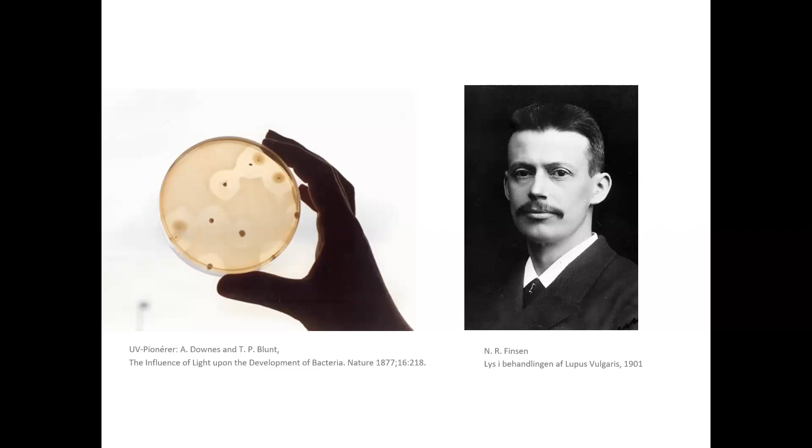So Finsen discovered that light, passively, of course, actively, chemically, could cure this disease. And Niels Ryberg Finsen's work spawned modernism as we know it today. I hope there are some architects present, but anyway, the three elements were light, air, and natural surroundings, and they should be distributed democratically in the new order as modernism was starting in the 1920s.

And some of the highlights of this modernism were actually hospital buildings, highlighting how we should live more healthily in this new modernist world. This is the Zonnestraal Sanatorium. It was originally drawn by Duiker, a Dutch architect, for diamond workers who had been infected with lung tuberculosis. They were polishing diamonds, and this very hard dust was ripping up their lungs. And the tuberculosis, once it got in their lungs, was very difficult to cure.

So they got this stay at this hospital. Actually, many of them got cured. It was a sanatorium with a special glass quality. It had Vita glass, it's called, very, very high transmittance glass. I was there together with Klaus Martini to visit the hospital some years ago. It had just recently been renovated.

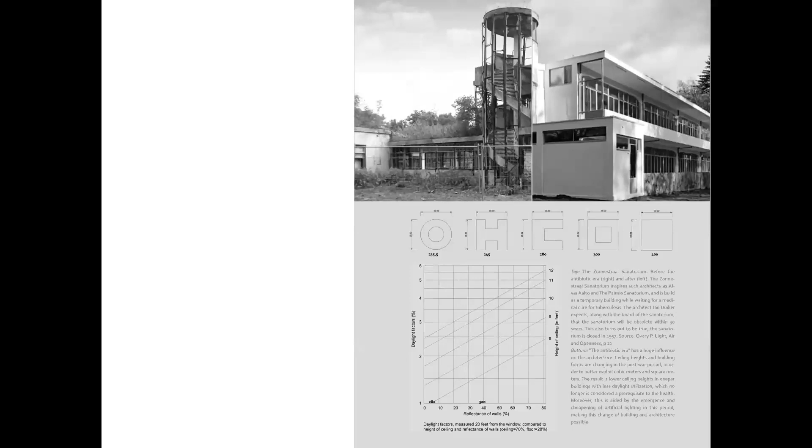But what happened in this period is also very interesting, because, I don't know if you can see my mouse, but the building typologies, the footprints of the buildings in this post-war period changed, so that the slender H-shaped, C-shaped, L-shaped, O-shaped buildings were gradually becoming more deep plan buildings. We also see that the ceiling height is being reduced in this post-war period, so daylight is no longer as important as it was in these sanatoriums, where the recommended ceiling height was 4.2 meters, which is quite a lot today. Now it's 2.7 in Denmark.

This is a short sketch of this development, only to point out the line from Downes and Blunt and Finsen and how they related to this modernist architecture. Not only hospitals, but also schools were designed according to this. Then came the vaccines and the antibiotic age, as we call it, antibiotics killing bacteria. And then we saw no architectural development for a long time when it came to health. It was like architecture was disconnected from this health regime that it originally was very, very close to.

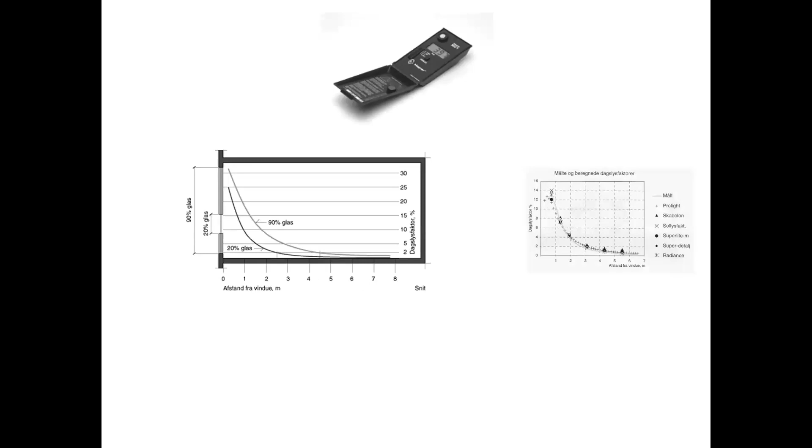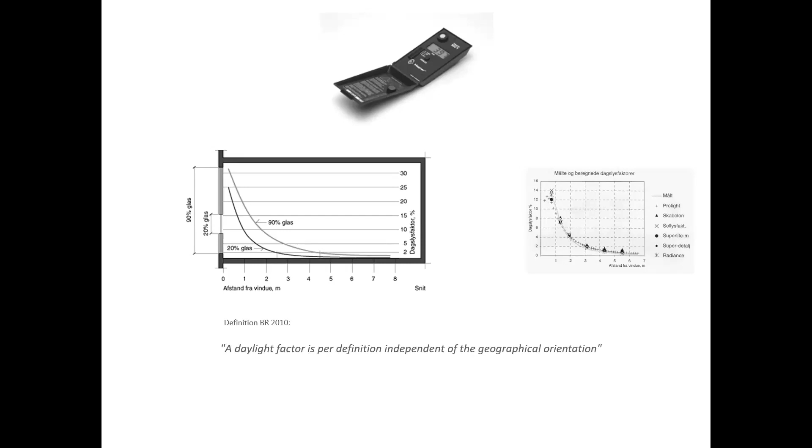At the same time, we also measure the light in this historical line. We start measuring the light in lux after the war, because we are no longer so dependent on the sun. We are starting to have more and cheaper electricity and electrical lighting, and we start measuring light, and we actually lose the orientation of the building. So if a building is facing north or east or south or west, it really doesn't matter in this post-war period, because we can just mend it by adding some artificial lights. So the importance of the sun and solar architecture is, you can use the word, forgotten in this period.

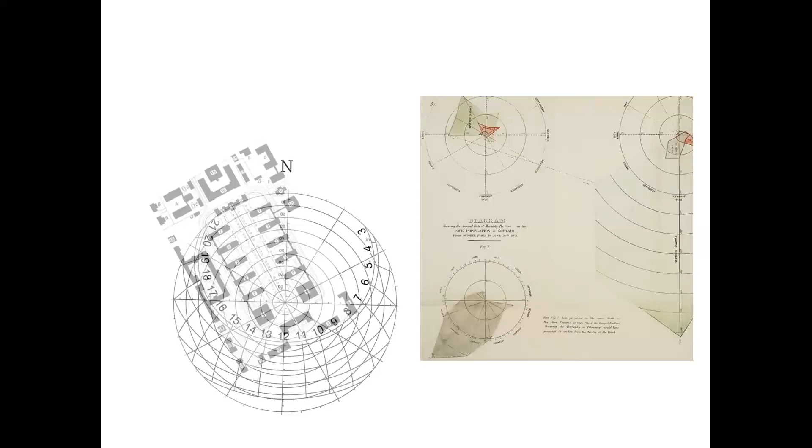Actually, this is one of my favorite examples, because in Denmark in 1920, we had this hospital. You can see the layout here to the left, where it was really orientated towards the morning sun, because that is stimulating not only to health, but also to sleep, as we know today, and to warming up the building when it was cold in the morning. And facing the winter sun, so that the sun during the cold period could heat up the original buildings

from 1920. But we see that this is the footprint of a modern building, a new building laid in the middle of the garden, completely in another direction, so that the wards are not facing southeast anymore. They are facing northeast, where there's no morning sun in the winter, and southwest, where actually there is no morning sun at all. So basically, this is an example of buildings losing their original orientation.

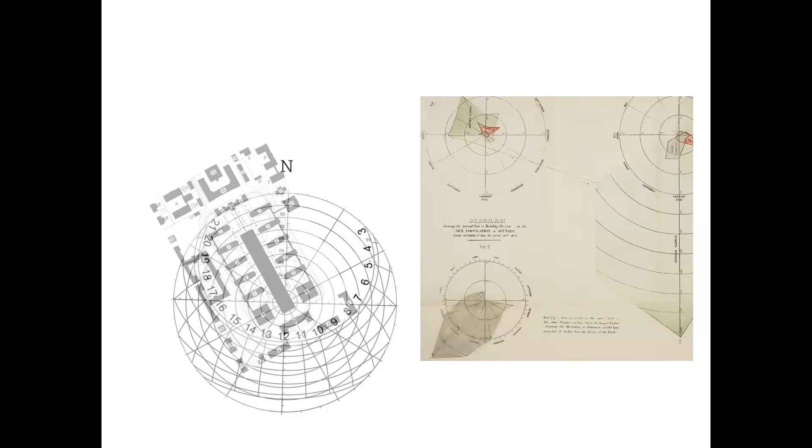This is an early example. That is the hospital that I was admitted to 20 years ago. It was a ward like this. So southeast is at the end of the corridor. The corridor is, what is it, 150 meters long, and then you have wards on both sides, so there's no daylight in these corridors.

To sort of re-establish what you call anchoring the buildings to the corners of the world again, or trying to make the sun or the solar architecture re-established and encourage architects and planners to take the sun into consideration, I developed a method in my time at the architectural school, at my PhD, and the tool I will show a film of. I think it will work. This is the clock.

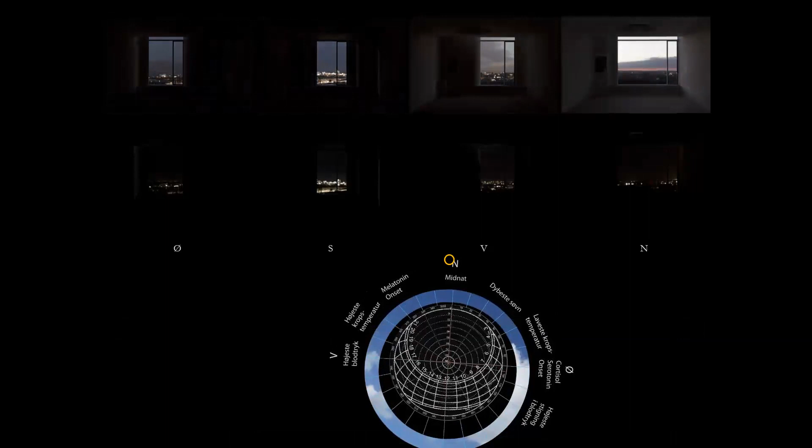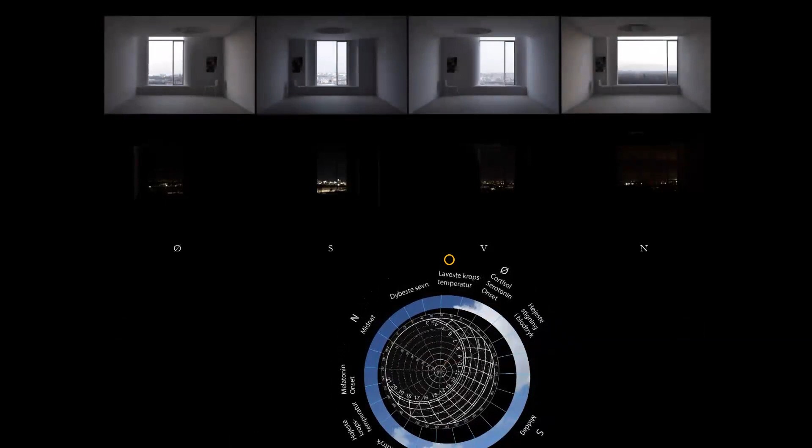So it all starts at midnight, because at midnight, I don't know if you have noticed that, the sun is in the north. It's quite interesting. We are having our deepest sleep during the early hours of our sleep, and also our temperatures are lowest. On the top film, you see summer solstice in Denmark at 56 latitude north, and we actually get morning sun very early. Below is equinox, where we have 12 hours of light, 12 hours of dark, and that actually fits better to the high rise in the blood pressure and the serotonin onset that we just passed.

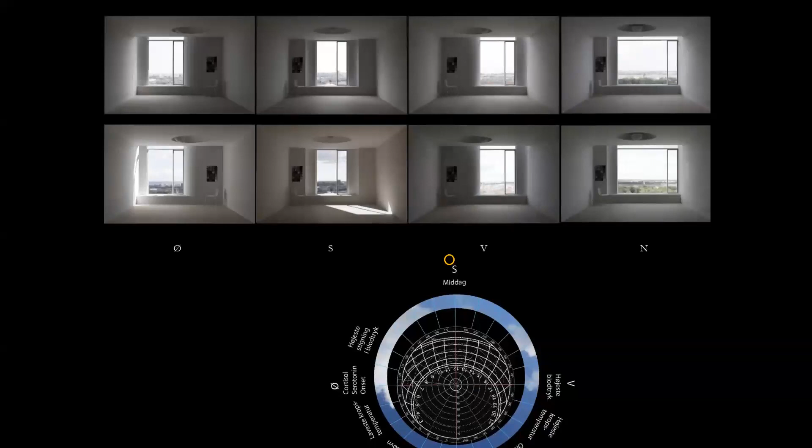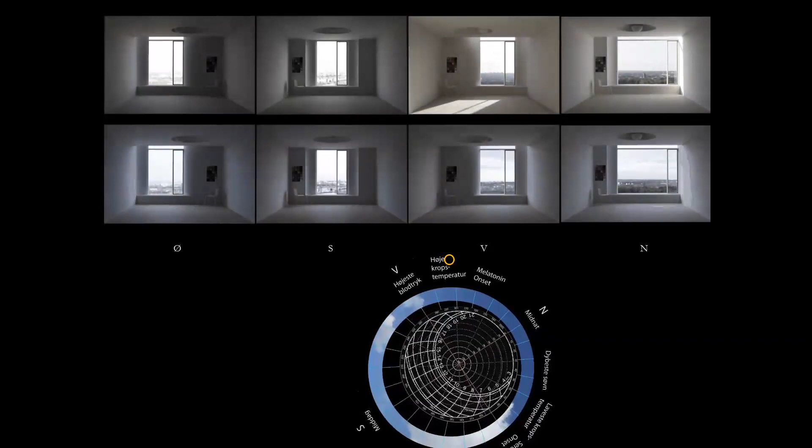And as we move on until midday, we see that east-facing and south-facing rooms actually are stimulating serotonin and the wake process better than west and north-facing rooms. And then, after a period of a lot of things going on in our body, we have a stable period from midday and the rest of the afternoon where nothing much takes place when we're talking circadian rhythm. Only that when we are close to getting to sleep, we have a higher blood pressure and a higher body temperature. And you can imagine a west-facing room with sun coming in at the same time as we have the highest body temperature and need for melatonin onset so we can sleep. That is not so beneficial for our circadian system.

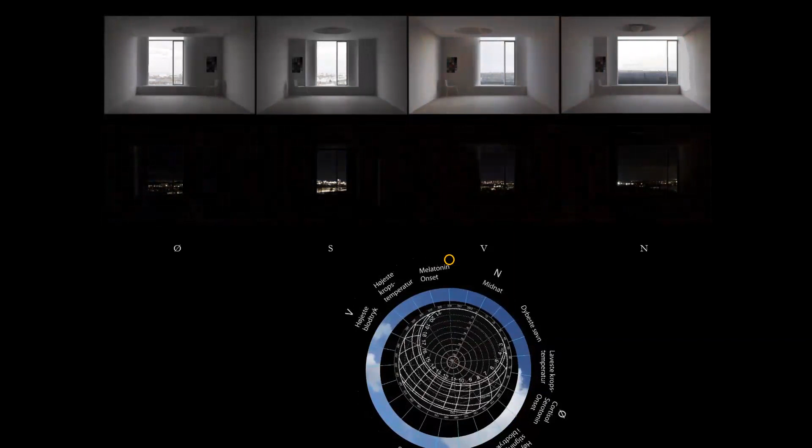So that basically was what I discovered using this method. And also I found, of course, I've not shown winter, but I've shown summer, that summer actually can disrupt, or you can say challenge, this natural body rhythm.

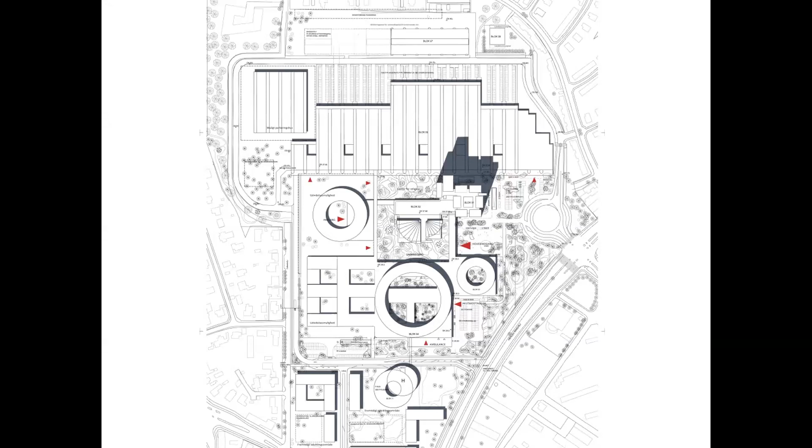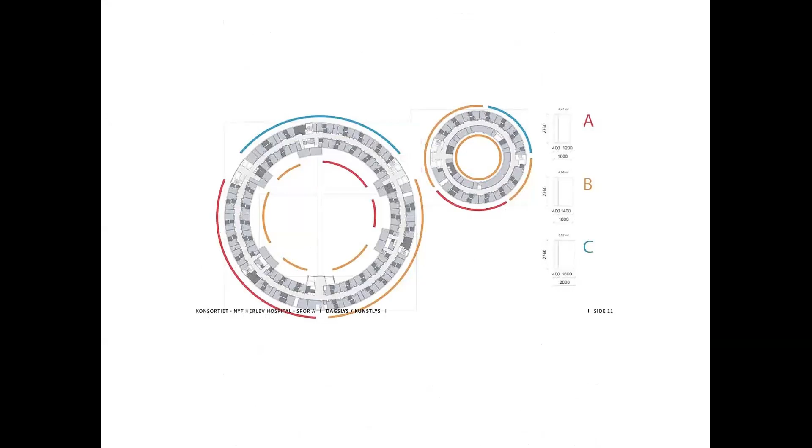That method I brought on to a hospital, New Herlev Hospital, where I was working with the facades together with Henning Larsen Architects, where we planned the facades according to north, south, east, and west. It was a round building, the round building in the middle. And this is the layout of the building, a building with a lot of wards, and then a support building with family wards, etc. We were really trying to incorporate north, south, east, and west, and we made some facades and simulations of how the windows should look.

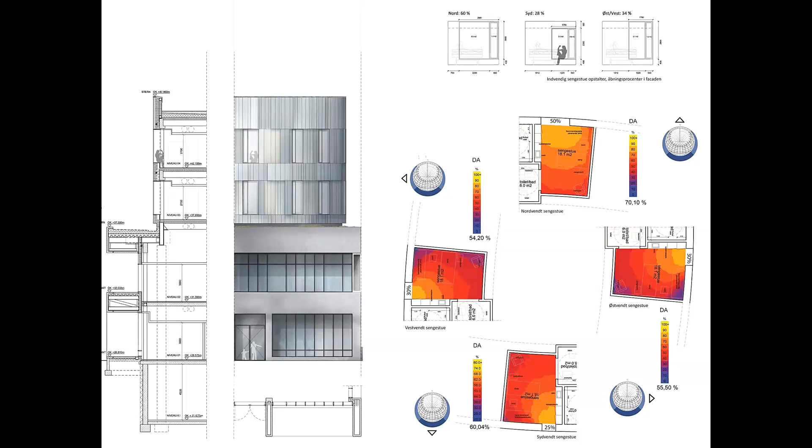We turned out with a layout where south is 25% glass area, while north is 50% glass area, to sort of democratically give light to the regions where there was very little light. So north having very little light, we planned for larger glass openings. We also reintroduced the clear glass from the sanatoriums. And we tried to make a hospital which is not completely symmetrical in its layout. We tried to make it asymmetrical solar architecture, because any solar architecture, as I showed you in the first slide with the Paimio Sanatorium, actually is to some extent asymmetrical in nature, simply because there's a difference between morning and evening sun.

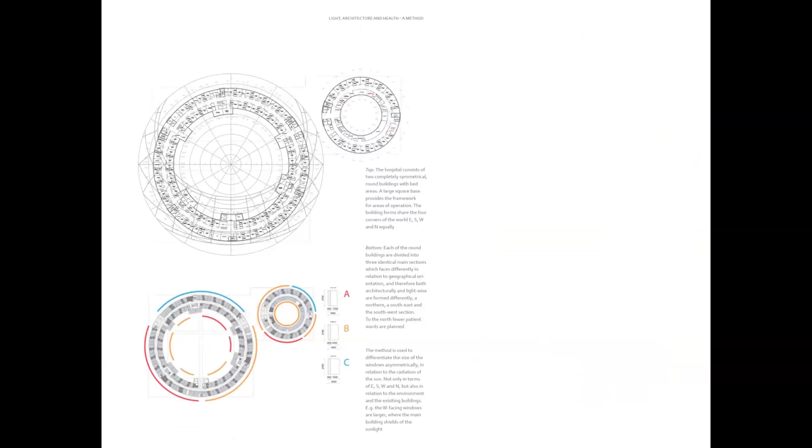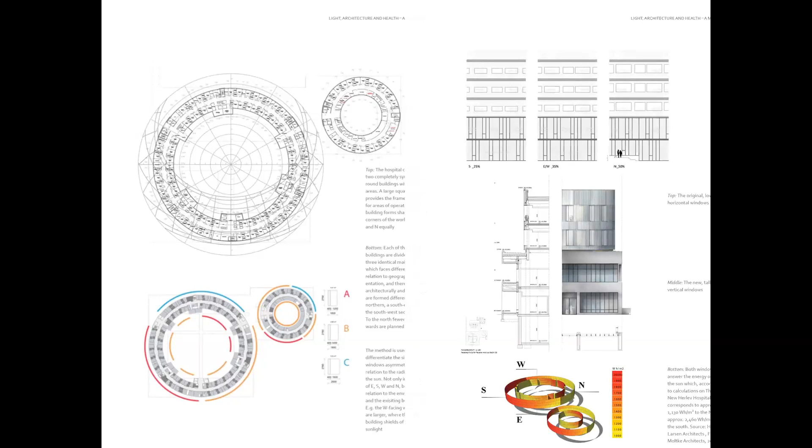So instead of horizontal windows, as you see up right, we actually changed the windows, down right, in the rendered building, where it's actually vertical windows, very tall windows, letting in the daylight. And we also, in this method, actually accepted the fact that we need darkness,

because darkness is an important issue, maybe under-addressed when we're talking light and health, because in a huge building made out of only glass, as you see to the right top, this over-exaggerating, or you can say optimizing daylight, actually comes with a price, because as I showed you in the film, we also need darkness. So walls and the planning of the placement and the size of windows is extremely important when we're talking light and health. So we have to remember that darkness is 1/3 of our lived 24-hour cycle. So we have to look at darkness also.

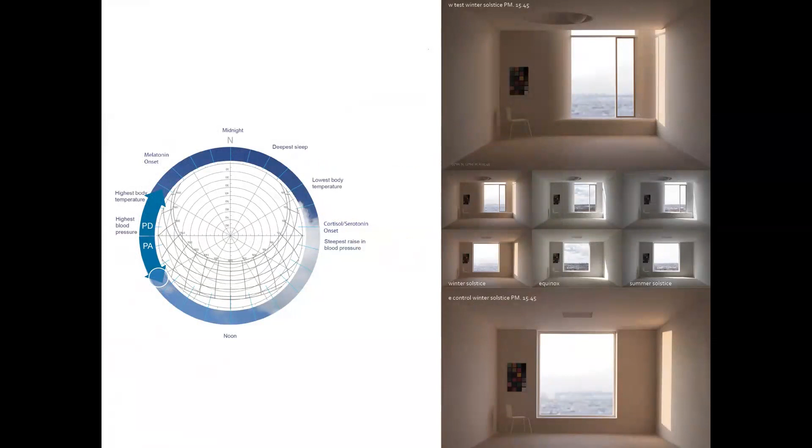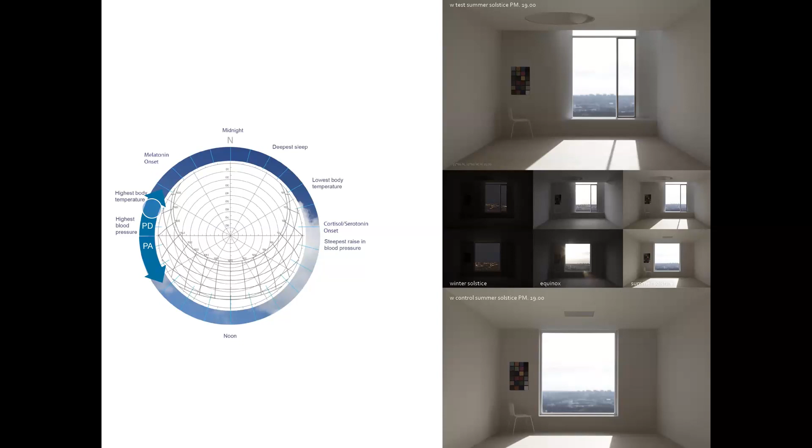These are just stills from the process. Actually, these are from the model I made on the roof of the hospital, where you see the different window sizes, and also very tall windows at the top compared to a lower window in the bottom. And here we have the winter, equinox, and summer. Also trying to balance for the summer, of course, not creating overheating, but at the same time avoiding that the patient should get too little light. So it's a balance. We try to balance the light.

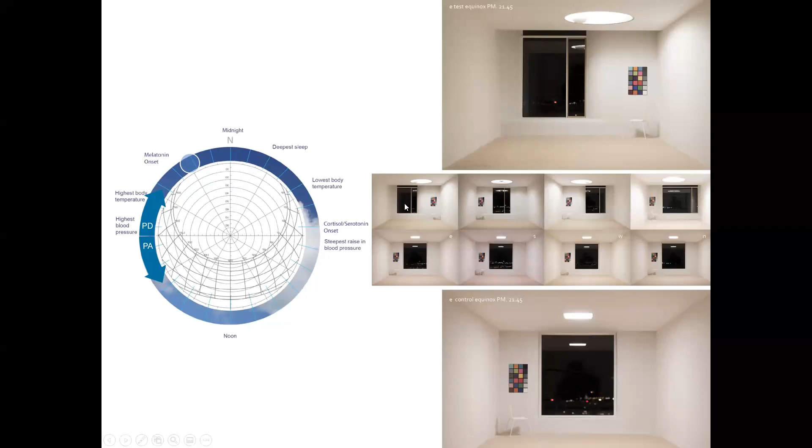Actually, we also added asymmetrical artificial lighting so that you can see. Can show on the mouse maybe. Here on the top, these four, we actually made different artificial lighting according to the corners of the world, so that the artificial light and dynamic light was a result of the planning of daylight. So, okay.

Yeah, just because I would like to show you this, I think this is a good example. This is artificial light on a Munsell card. Today we can actually address all these colors simply by LED, tunable LED. So you can see how they change. The colors are the same on the Munsell card, but at least to me, it's fascinating to see this magic trick of light, that we can actually change colors and change perception of colors only by stimulating or activating different RGB LEDs. Quite beautiful, I think. Okay, I move on.

Klaus Martiny and I, we were looking at this old grid, old layout, and how does it affect patients? Because of course, what I've spoken to you about now is mainly historical facts and theoretical facts. So let's put it into practice, and we took this building. It's a building from 1920, and the building is facing southeast. And the reason why it's facing southeast is, as you can see here, that the whole facade of the building is actually receiving the winter sun. So the facade was planned for the winter sun. It's not a coincidence that the grid is ending here and it's opening up to the sun, so that the solar path here, 8 hours of sunlight, actually can penetrate to the patient rooms.

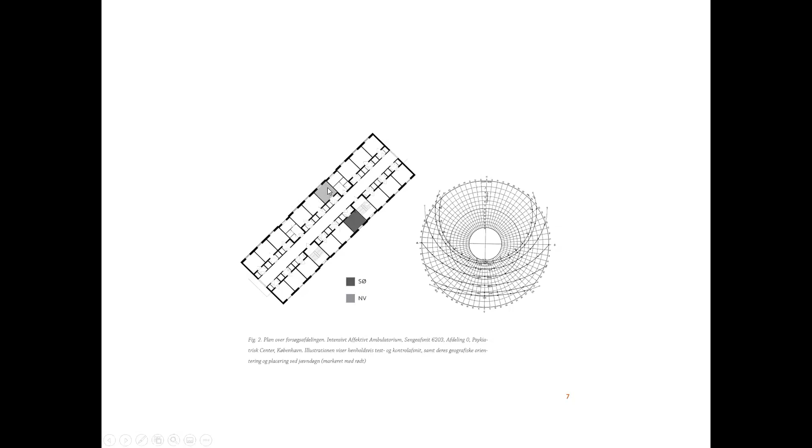All patients were in big wards at that time. In the 20s, there were 26-bed wards. But of course, today we've changed it to single and double patient rooms. And that has created a bright side and a dark side. So this is shown here, that we actually have the bright side, which I unfortunately have painted black. Sorry about that. It should be white. And the dark side facing northwest, that in this case is bright. So we wanted to see if there was any effect of this. This is the southeast facing ward, and this is the northwest facing ward. The distribution of light during the day, whether this huge difference in light also had an effect on the patients.

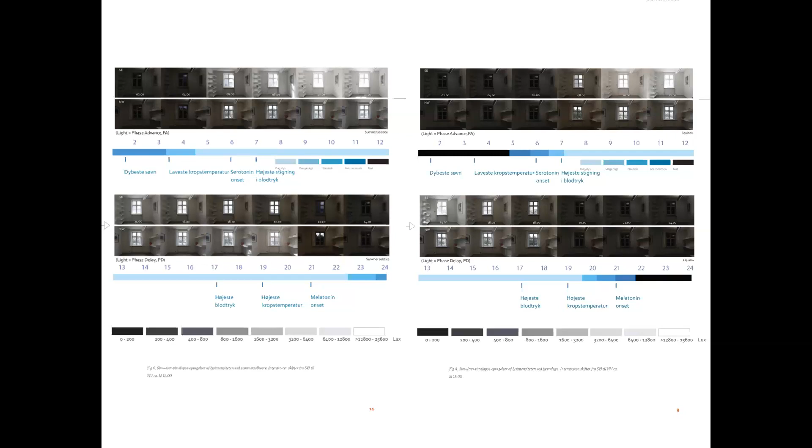The left one is summer, and the right one is equinox. You can see that very little sun is coming northwest at equinox compared to southeast. This is how they looked during the day. Morning lights and then evening lights to the right. You can see the time of day 1, 2, 3, 4, 5, 6, 7, 8. And then actually it continues below 13, 14, 15, 16. And you can see that the southeast facing, which is the top, is actually receiving all the morning sun, of course, and the northwest facing wards are getting very little and actually very late daylight.

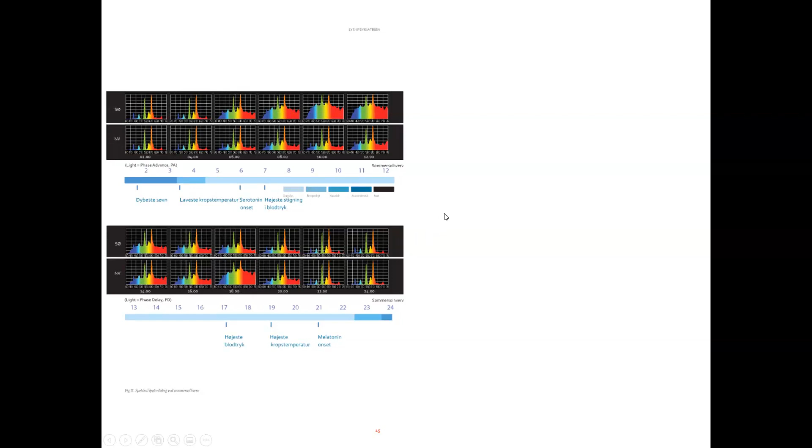So we also measured the spectral distribution. I will not go into details, but we of course found that because of daylight, we had a huge difference in the shortwave light, as you can see here, between southeast and northwest. A huge difference in the morning light. Of course, much more short spectral light stimulating the phase advance of the diurnal rhythm. And in the northwest facing room, very little. And actually also a lot of light very late in the northwest facing rooms, where it might be too late, because here it starts to interrupt perhaps the night sleep of the patients. Okay, just to show the spectral.

What we found was that after 1 year, we made up the numbers and looked at the duration of the hospitalization of the patients. We found an average of 29.2 days in the southeast facing wards and 58.8 days in the northwest facing wards. So it's a huge difference between these two orientations.

It's a weak study. We do not know why it is like that. We have not made any clinical trial. It was a cohort study where we just followed the patients. But anyway, the difference is quite remarkable, and of course can be explained by light, and also maybe other factors we don't know. But light is essentially one of them.

We also could see out of the data that half of the patients had vitamin D levels below the recommended 50 nanomoles per liter. They had between 9 and 44 nanomoles, with an average of 32. And that is, of course, because they're spending so much time indoors.

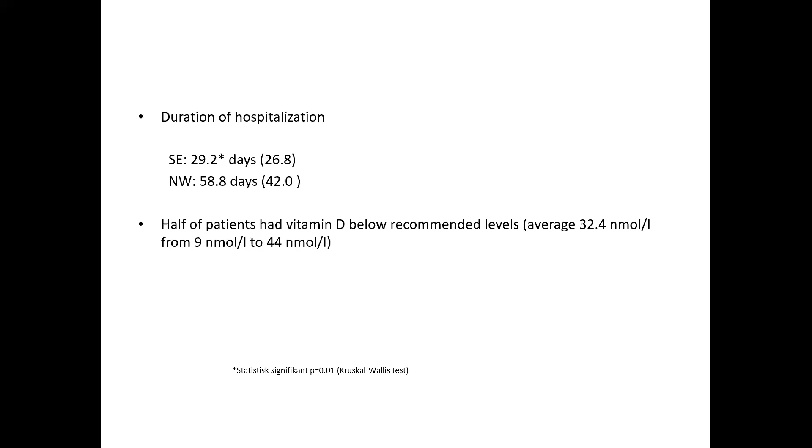That made us, at least me, and also Klaus Martiny think that maybe there's something wrong with our indoor environment, since they do not have access to UV light in the indoor environment. So they're actually low on vitamin D if they are spending too much time indoors. And that leads on to another project where we actually looked at special glass types transmitting UVB. A very interesting study. We made the headlines in the national news because of this.

Found some interesting findings, mainly about energy, because it was sponsored by ELFORSK. ELFORSK is a national program for energy saving research. But we also found some differences when it came to vitamin D and sleep.

So the buildings we looked at were in Haderslev in Jutland, a small town in southern Jutland, 55 degrees latitude north. 2 identical buildings. They look like this. This is one of the buildings. This is the time lapse showing. I think it's quite nice to see in the evening how they shut down the lighting and fall asleep gradually.

And both buildings were the same. They were similar. They were built in 1956 and then renovated in the 90s. And then we had the chance to renovate them again in 2016, changing one of the buildings to very, very clear high transmittance Vita glass, and the other building to state-of-the-art energy glass, which in Denmark is a 3-layered coated glass. And the buildings looked like this.

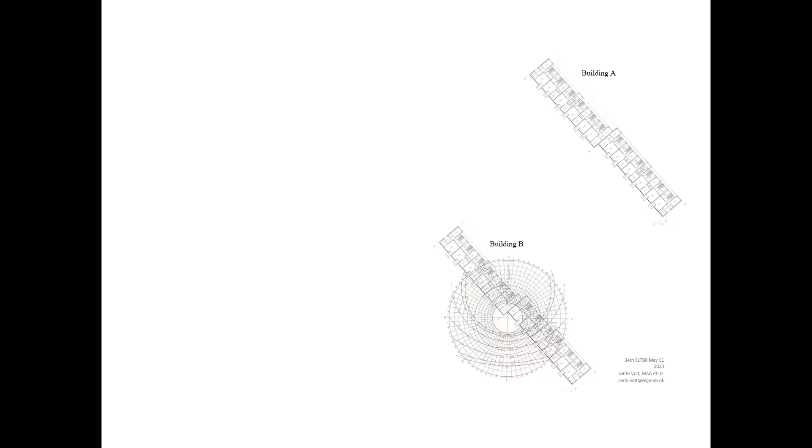They were facing southwest, and that was originally planned because when the workers come home from work, they should, of course, have access to the sun. That was part of the plan. So both having glass facades facing southwest in this case.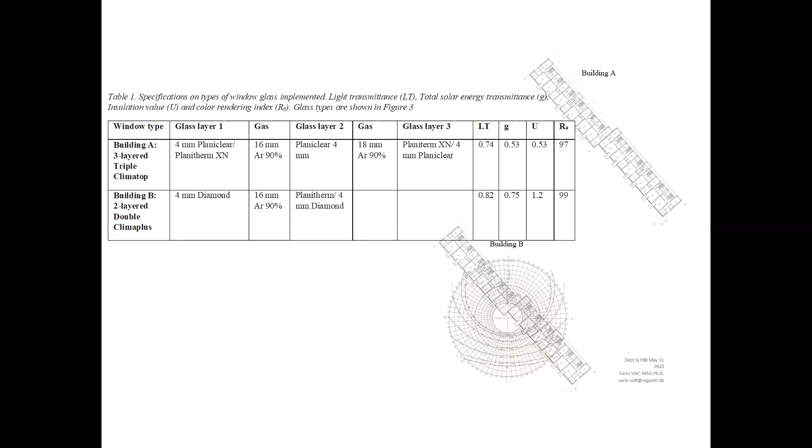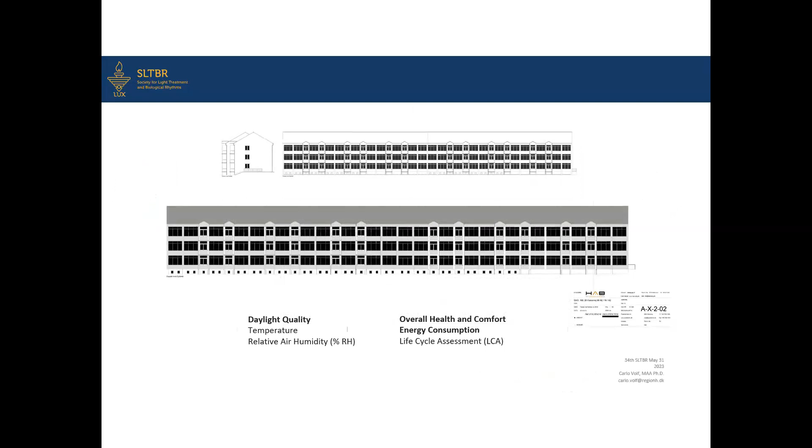This is the facade drawing. We looked at daylight quality. We looked at temperature, air humidity, overall health, comfort, energy consumption, and life cycle assessments. I will only focus on daylight quality and overall health and comfort and energy consumption here.

Here are the glass types. We chose 2-layered low iron to the left, then a 3-layered low iron as a reference. We did not use it in the buildings, we only used it as a reference in the middle. And then we used the 3-layered low energy glass in the other building to the right.

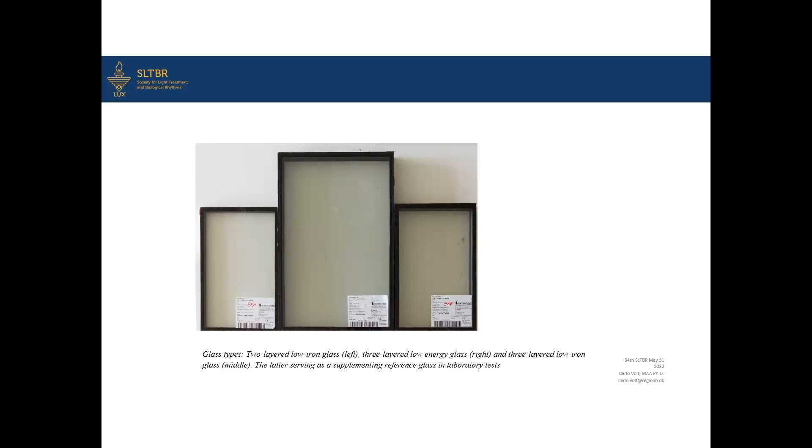And the results: we looked at, of course, the visual daylight, 380 to 780 nanometers. We looked at melanopic and rhodopic light, equivalent daylight intensity. We looked at UVB and also the heat transmission in order to establish energy consumption.

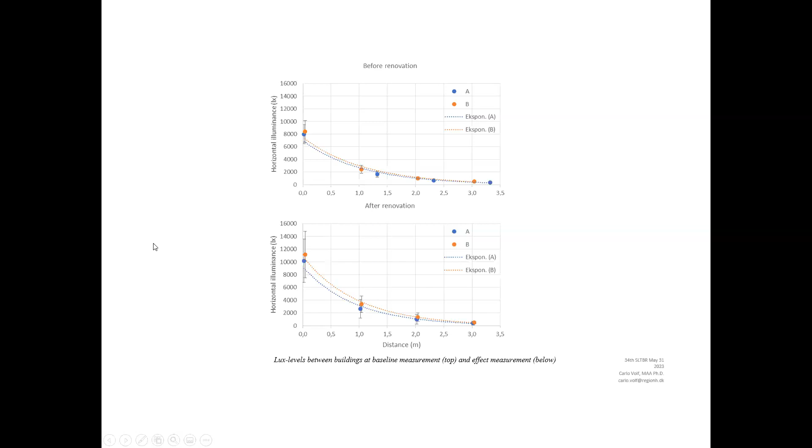Okay. And if you look at the visual daylight, the top one is baseline. You actually see that although both buildings had the same glass in the baseline, there was a difference between buildings at baseline. But at the effect measurement, we saw that this difference was much larger when we changed. The red one is 2-layered glass, low iron, and the blue one is 3 layers. So the difference was around 20% of the daylight level in lux.

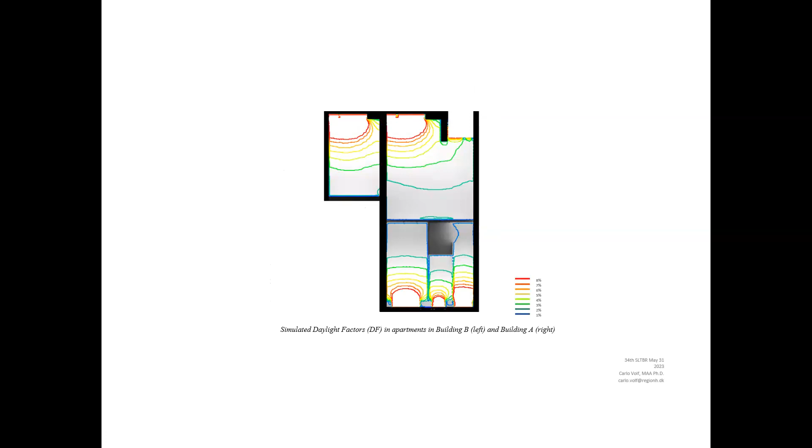This is the apartment, how it looked with simulated daylight factors. So it was quite bright apartments, actually, with a daylight factor of 8% down to 1%. So very bright apartments, but still it made a change what glass we were using.

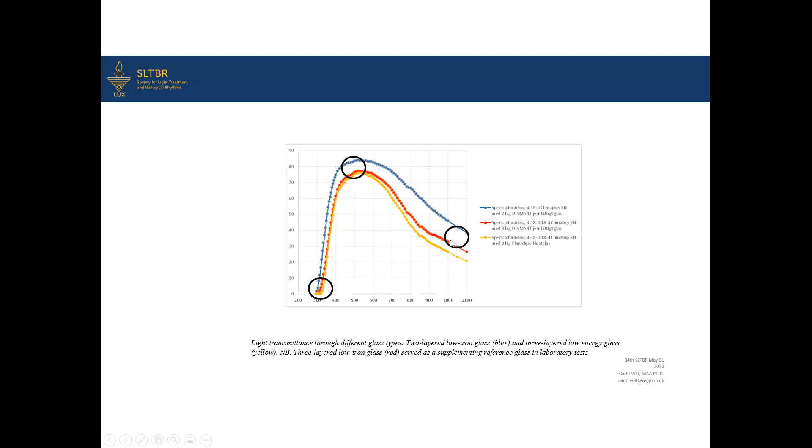When it comes to daylight quality, we look at 3 things. We look at the UVB, which is the lowest region down here, and then the short spectral light stimulating the circadian system, I mean the melanopic lux. And then of course we also looked at the heat, which is the infrared at the top here, at the end here.

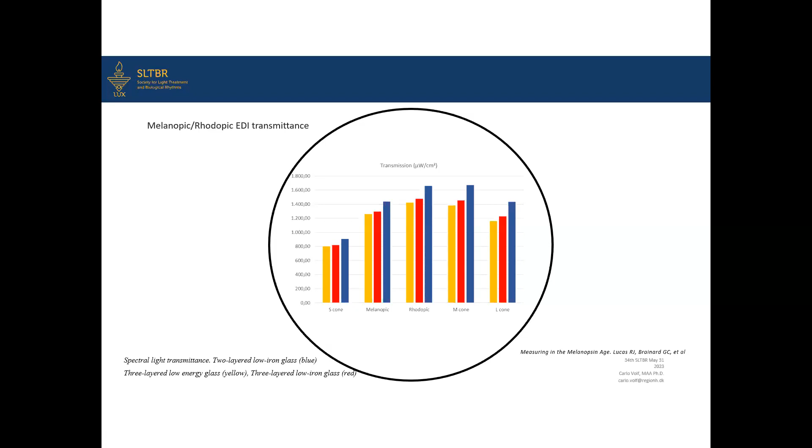And if we look at the melanopic lux, what's interesting is this second one, the melanopic one. We could see that 3-layered glass, which is the yellow, transmitted much less than 2-layered low iron glass, which is the blue. So approximately 16% more daylight. And with a lux level outside of 10,000 lux, this equals around 160 melanopic lux in difference. So quite a lot.

In the UV spectrum, we also found that in this case, the 2-layered glass, which is blue, low iron, clear glass, actually transmitted UVB, which is 280 nanometers to 315, while all the other glass types, even the 3-layered glass with low iron, did not transmit UVB. So the number of layers actually has an influence on the UV amount, not only the glass quality. So it was quite interesting to see.

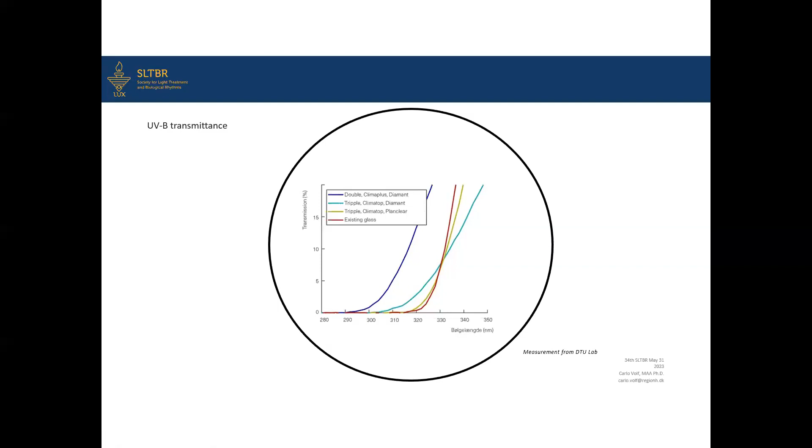When we looked at the energy consumption, we expected that 2-layered glass would have a higher energy consumption simply because 3-layered glass is sold as energy glass, low energy glass, actually reducing the amount of energy for heating. But we found the opposite in this study. We were quite surprised.

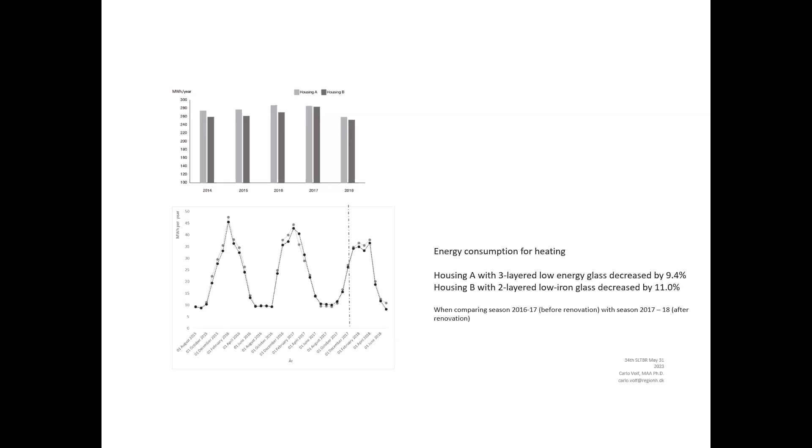If we looked at the health aspects, we looked at the 2 buildings. The building with 3-layered glass had an average age of 70.3 years, and the building with 2-layered glass an average of 55.4 years, and also a large 47.1% was working, while only 5.9% was employed in the building with 3-layered glass. So there was a huge difference in sociodemographics. The building with 3-layered glass was old and tired people, and the building with 2-layered glass was younger and still working.

we also found that the people in the building with three-layered glass reported more difficulty sleeping on a scale from 0 to 3. The people with three-layered glass reported more difficulty sleeping after compared to the residents in the building with two-layered glass, which actually is supported by our daylight measurements, because we could see that they were receiving less light during the daytime.

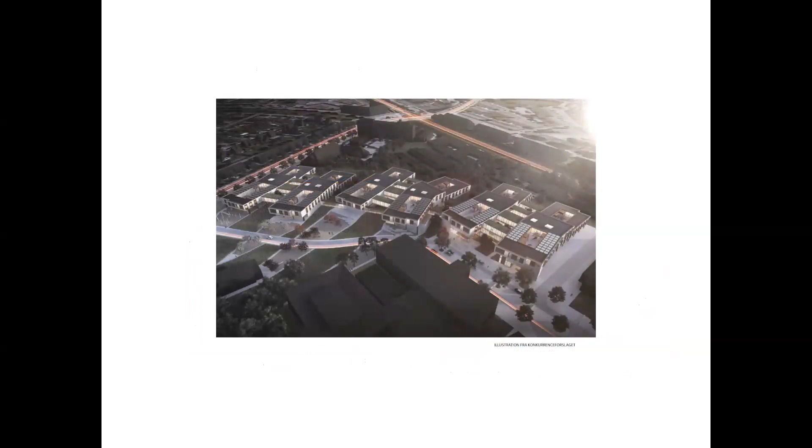The last example, I don't know how much time I have, Anna. Yeah, I think if you could wrap up soon, that would be great.

Yeah, thank you. Just to show the current project where we are looking at a hospital now, together with Klaus Martini, we are trying to optimize both the artificial lighting and the natural ventilation at the new hospital. And we do that, this is the ward, by having natural ventilation built in the ceiling here, the passive cool. It's a big problem with modern hospitals, they're too hot.

So with natural ventilation, we can actually create a better atmosphere, especially before the sleep, that we can cool the building. We expect to cool it around 3 degrees in the evening. And we are also using dynamic lights. These are early examples of the light fixtures to stimulate the circadian rhythm.

So we're both asking and reporting, hopefully getting results on temperatures and artificial light levels based on 1,000 patients. It's quite a huge project we're doing. We're having a baseline now, and we are changing the setting and expecting to include a total of 1,000 patients during 2 years. So that's further research. Hopefully we will be able to share these results on SLTBR or maybe the Daylight Academy.